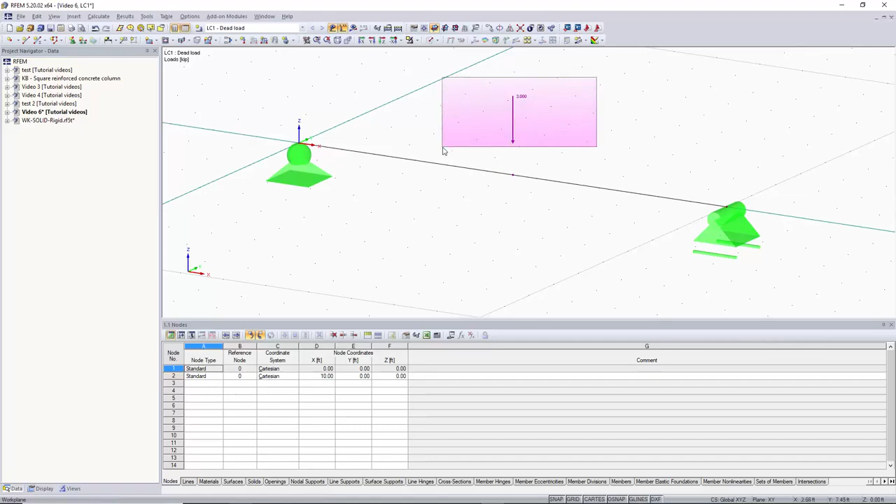We can then just click on our line or member, and you can see that it'll put a point load of 3 kips 50% away from the start of the member. We'll delete this load, and we can go back into new line load. Now let's say we wanted to have multiple point loads.

We can choose this N times P option under concentrated, and now we have more options down in our load parameters, where if we wanted, let's say, 6 point loads of -3 kips, and you can see up here a graphic change to represent our different options down here.

We now have an A distance away for the first point load, and then the rest of the distances are a B distance. So for our first distance we would like to have 0, and then for the rest of the distances we can set them to 20%. So now our point load will start at the first node of the member, and then each point load will be 20% distance away from each other.

We can click OK, and now we can apply this to our beam. And as you can see, we have 6 point loads, each 20% distance away from each other. We can highlight these, delete them.

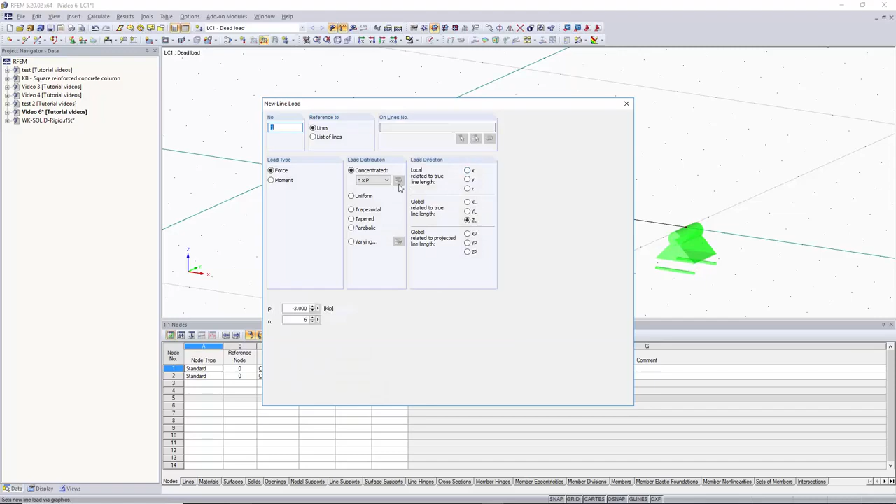And now let's say you wanted to have a pair of point loads where 2 loads are paired with each other, and you can pick the distance of those 2 paired point loads away from each other, and then also the distance between those 2 point loads. You can choose this 2 times 2P option under concentrated.

We want our point loads to still be -3 kips, and then you can see that we have this X distance away from the start of the member. We can set that to 10% away from the member, and then we can have our distance between our 2 point loads be 10%, and then the distance between those pairs we can have also 10%.

Now you can see what this looks like when we add it to our beam. We have 10% away from the start, 10% between our pairs, and 10% between those 2 pairs.

If we wanted this to span longer along our beam, we can just double click on our loads, and I would like to have the pairs start from 25% away from the start, and we'll keep 10% between them, and then we could have 20% in between the pairs themselves. And now you can see that we have 25% from the start, 10% between the pairs, and then 20% in between those 2 pairs.

Now let's say we wanted those same options, but we didn't want pairs, we just wanted a single point load. Well, we have the option for 2 times a point load, and now we can do 2 separate point loads. Let's make this -5 kips. We can make the second one -3.

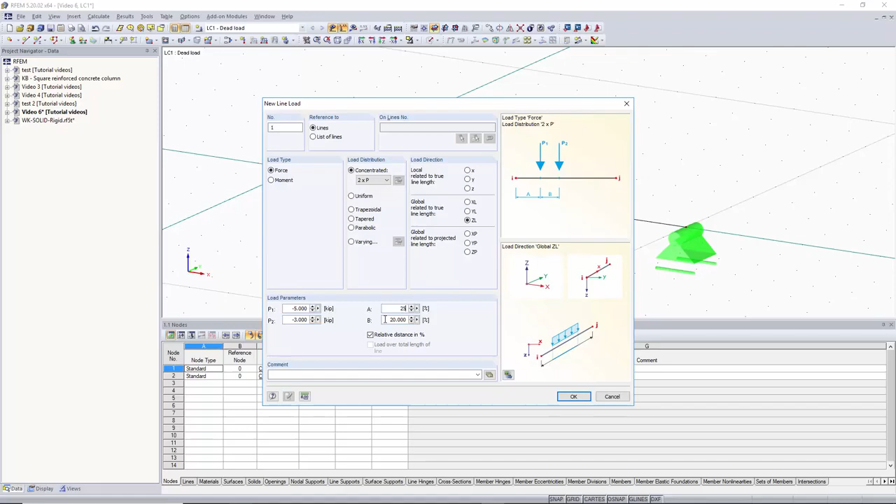And we have the option to set these 2 point loads 25% away from the start for A, and then the distance between those 2 point loads we can set to 20%. We'll click OK, and now we can click on our line in the graphic, and you can see what these 2 point loads will look like graphically. We have 25% away from the start, and then 20% between them.

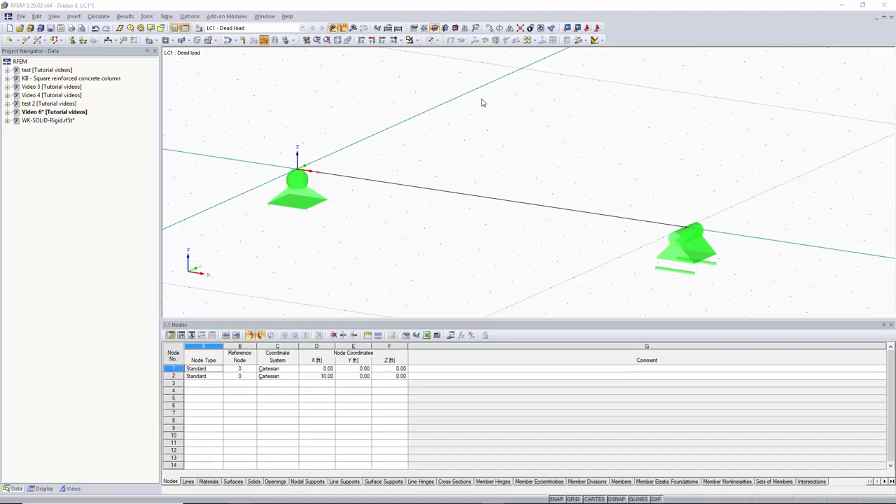Now let's say you wanted to add point loads starting from the highest from the beginning, and then every 10% you wanted the point load to go down in a trapezoidal shape. You can easily do this by going to member or line load, go into your concentrated loads, and we have the option for user defined. This you can get really technical with, and there's a lot of great options.

If you go under the edit user defined concentrated load button, you have the option to create point loads wherever you want along the span of the beam by using this table, where X is the % distance away from the start. The delta X, or the change in X, is the change between each of your point loads, and then you can set the point load in this right hand column.

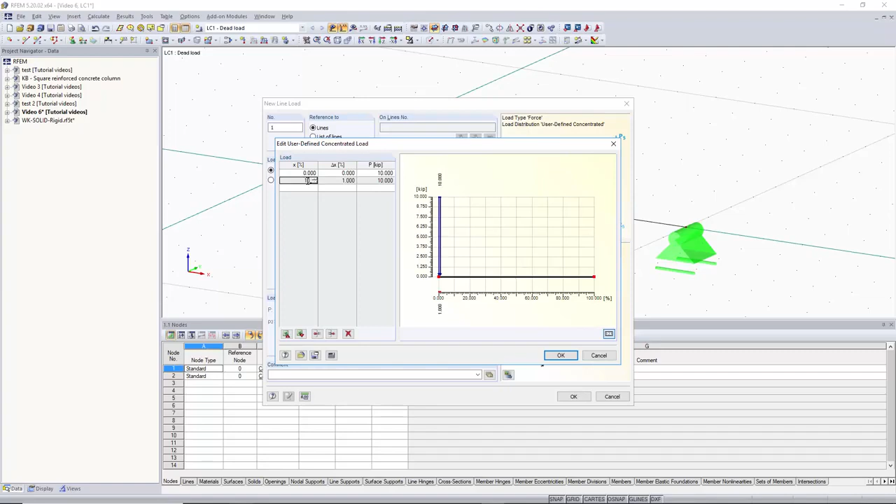So if we wanted to start our point loads at the very first node, and we want the first point load to be 10 kips, and then the next one we would like to start at 10% away from the start, and we want this to go down in a linear fashion, so we'll have 9 kips.

And then if you follow this, the program's smart enough to recognize that this is a pattern you would like to make, so then you can easily just click on the next cells and the program will automatically create and fill in the next cells for you, which is pretty nice. So now you can see we have our linear point loads going at a change in slope of 1 kip all the way along the span of the beam until it gets to 0.

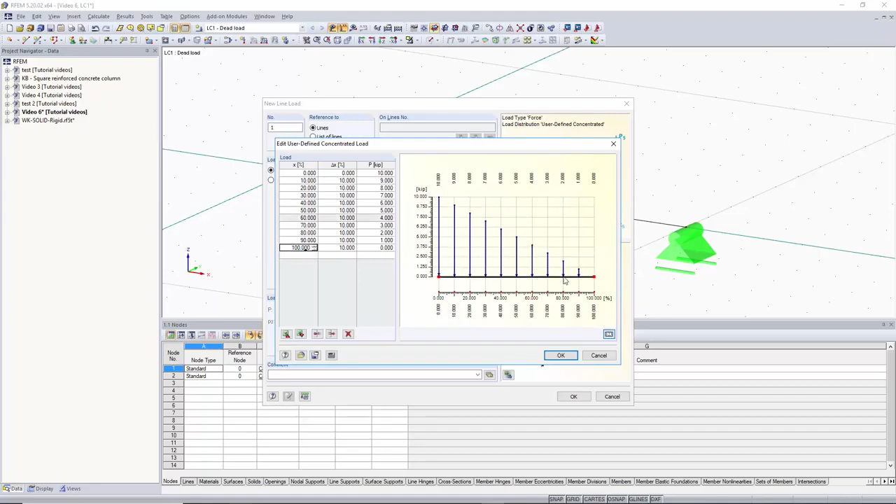Now we can click OK and we can see what this looks like. We don't have to do anything else in this dialog box. We can click OK again. And now we can graphically select the line or member we would like to apply this load to. And as you can see, our loading is applied to the member automatically, and it is in the positive Z direction.

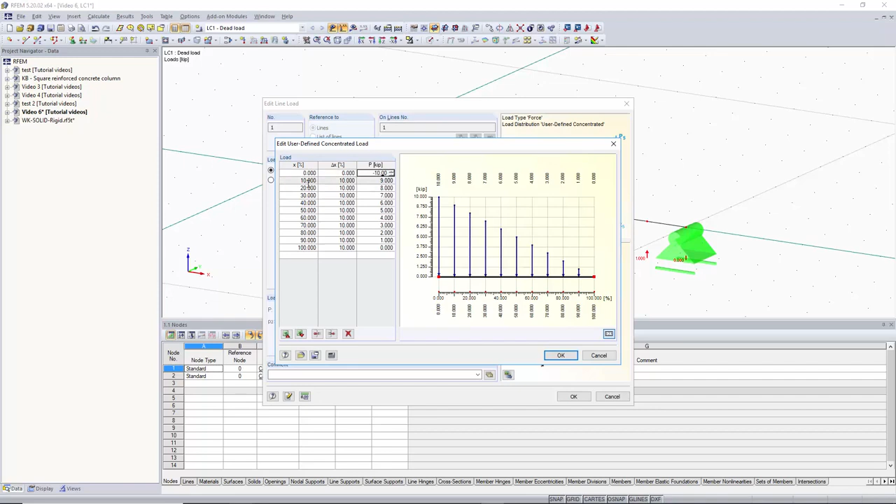So if you wanted this load to be down on the member, you can just go back into user defined and you can set this first load as -10, and you can just delete all of these, set this back up, and just automatically create your loading again. Click OK, and your loading will be switched.

So I hope this video helped expand your knowledge on how to apply multiple point loads on a member. Within the next video, we will go over the same concept, except it will be for uniform loads and how to apply those to the member.